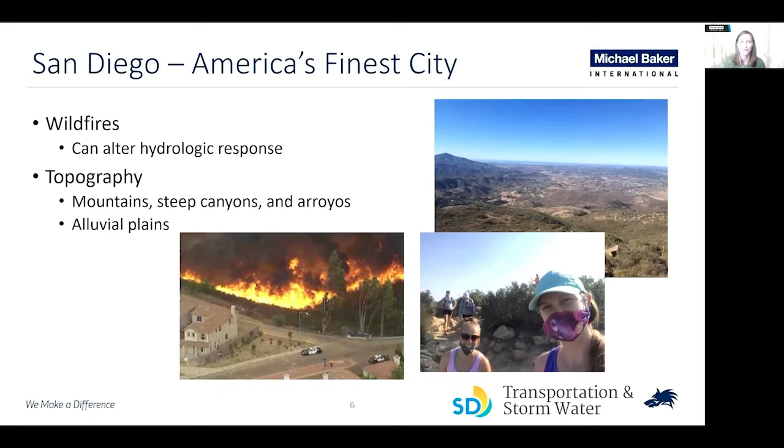However, it does mean we have excellent hiking trails just a short drive from the city center, and fantastic views of the skyline from the top of your favorite mountain.

The city has 6 major watersheds, with headwaters all in the Volcan Mountains to the east, all draining to the Pacific Ocean. The local ecology, like most of Southern California, is desert scrub and chaparral, mostly drought-resistant vegetation. At over 26 miles of coastline, tidal marshes and canyons can be found, creating a transition from shallow marsh to imposing beach cliff. The city is also home to many listed endangered species of plants and animals, including many migratory birds on the Pacific Flyway, which is a real thing.

Protected areas are designated as Areas of Special Biological Significance, or ASBS, or Environmentally Sensitive Area, ESA, which is somewhat similar to a Coastal Barrier Resource System, or COBRA zone, that many of you might be familiar with. As a note, the city does not have any COBRA zones.

So when we're not complaining about the weather, we're building. Land uses within the city limits are largely built out, with the highest concentrations of development downstream in the watershed, set against their coastline. Some of this area is also reserved for our military, which is a large proportion of the local economy. Tourism is the next largest industry due to our expanse of beaches, parks, and the wonderful climate. San Diego County had over 32 million visitors in 2012 that collectively spent over $8 billion.

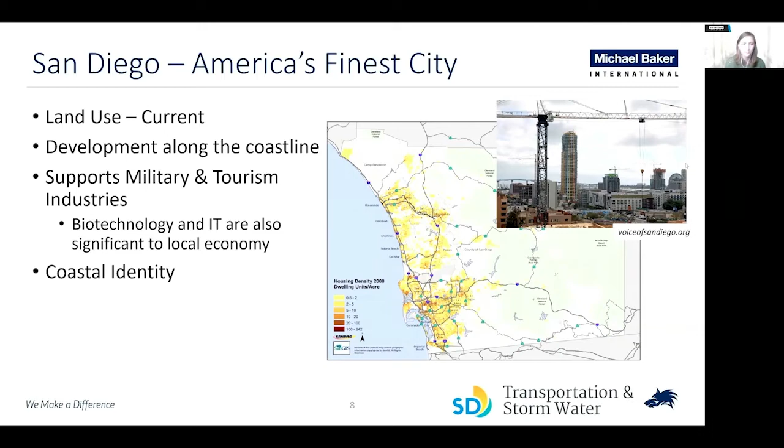And we're not just building, we're growing. At about 1.5 million people currently, that number is forecasted to increase to 1.9 million by 2050. This population increase is also expected to need more jobs and more housing, which those needs are expected to increase 25% and 19% respectively between 2020 and 2050.

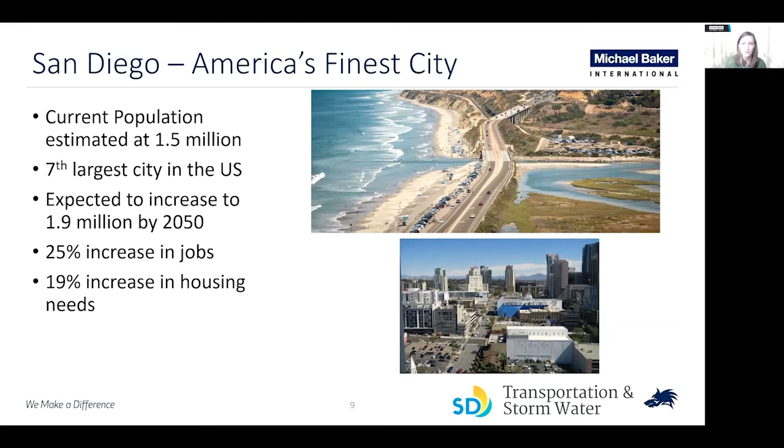Which brings us to the floodplain. The city has over 35 square miles of special flood hazard area, including both coastal and riverine flooding sources. Mapped areas within the city include Zone A, AE, AO, coastal VE, and X.

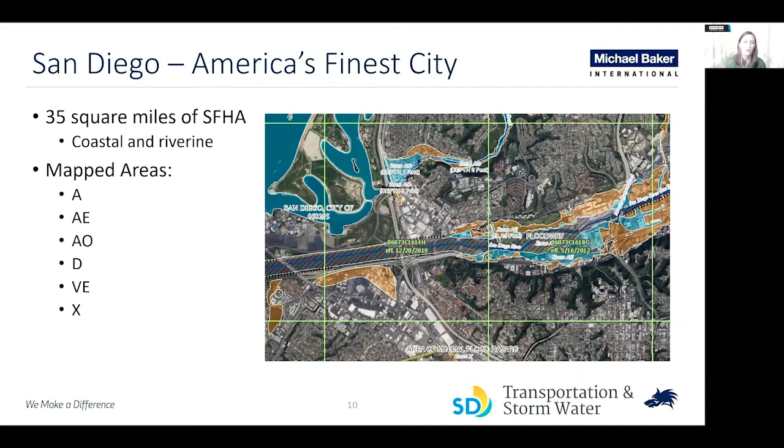The city maintains a municipal separate storm sewer system, or an MS4 permit. The whole drainage system contains approximately 50 miles of streams and channels, 20 miles of brow ditches and box culverts, 770 miles of storm drains, and 47,000 structures, including 5,000 outlets.

Additional flood control is afforded by 11 dams, 4 of which are in the city limits. We also have 7 levee systems, 4 of which are owned and maintained by the city.

At the coast, we're lucky that much of the shoreline is protected from tidal floods by lagoons, bays, and estuaries. However, this is in stark contrast to large cliffs or bluffs that, while they do provide elevation above storm surges, need to be carefully monitored for the public.

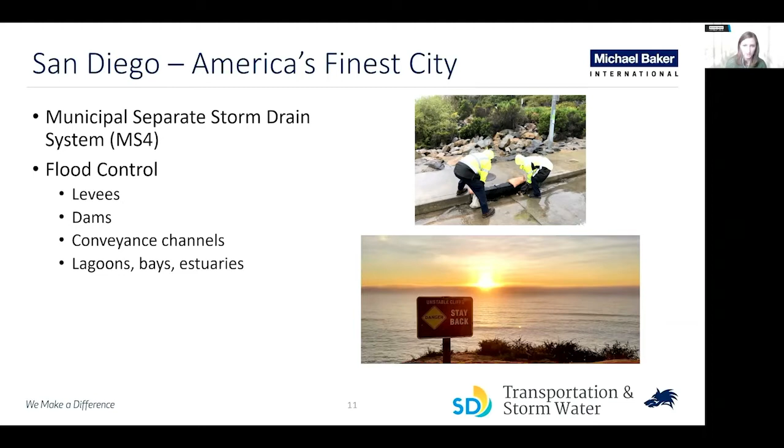So, who oversees all of this? As it pertains to managing the floodplain, the Transportation and Stormwater Department is responsible for managing all of the regulatory special flood hazard area, conveyance channels, and the MS4 storm sewer system for the city.

So the mission of the Stormwater Department is to both protect water quality and provide safety from flooding. The 6 core principles are to provide flood-safe communities, look at stormwater as a resource, provide community benefits, protect the environment, utilize public partnerships, and ultimately provide clean, safe water.

So T&SW is responsible for a number of assets to fulfill their mission. Hard assets include the conveyances, pump stations, and diversions, structural BMPs, and flood control structures such as levees and dams.

To manage flood risk, T&SW conducts regular channel and pump station inspections and routine maintenance, operates tide gates during floods, completes storm drain repairs and replacement, manages stormwater basins, and is also a steward of the local habitat and migration areas.

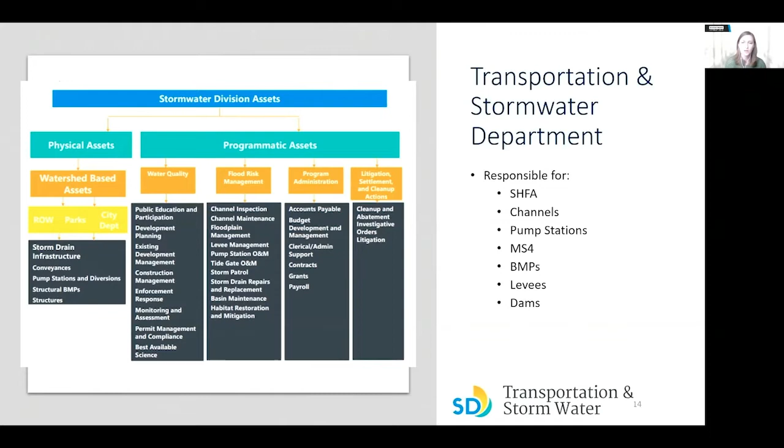T&SW is also responsible for administrating the NFIP, which includes issuing floodplain development permits, completing inspections to assure compliance with the local ordinance, maintaining records of floodplain development, assisting with the preparation and revision of maps, and helping residents obtain information on flood hazards, map data, flood insurance, and proper construction measures.

So for the risk mitigation minded in the audience, there are many challenges for the city. While the rainy season is short and confined, these intense storms, plus topography, plus large amounts of built upon area, lead to a flashy hydrologic response, which can be exacerbated by wildfires.

Increase in population and housing demand also means less space for flood mitigation area.

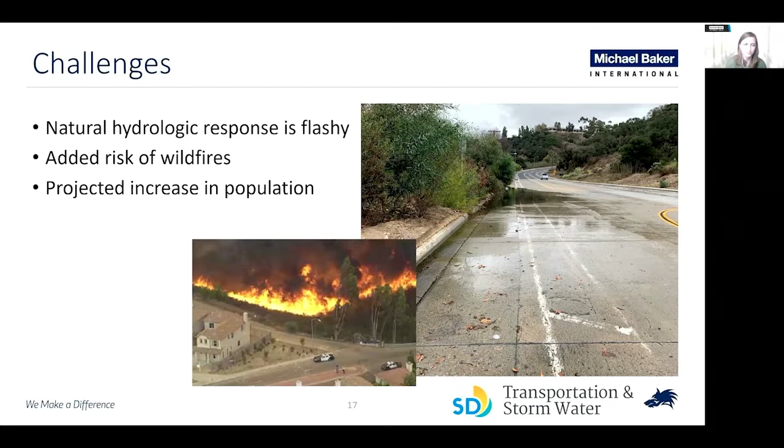Building green infrastructure is also challenging, as the vegetation, which is crucial to the proper function of any green BMP, needs a consistent supply of water. Our climate doesn't really support that, and most, if not all, stormwater BMPs require some form of irrigation.

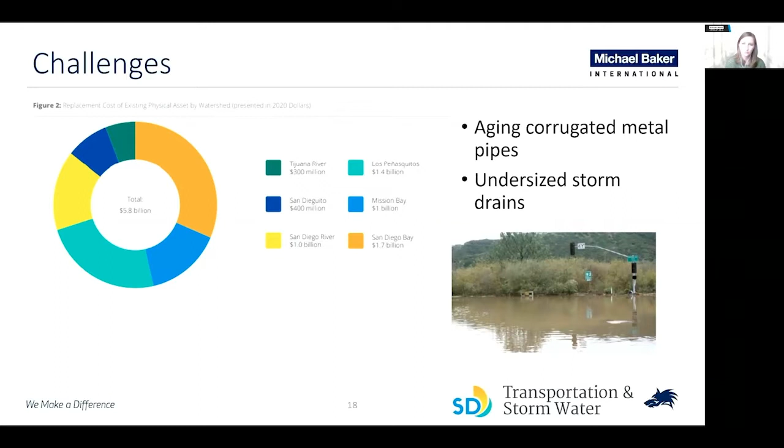We also have a lot of natural areas that need protection. Arroyos are steep-sided gullies formed by fast-flowing water in arid and semi-arid climates of the southwestern United States. They are susceptible to hydromodification, which is the alteration of the natural flow of water through a landscape due to urbanization as a result of their steep slopes and narrow flow areas.

Impacts of hydromodification are a general decline in the health of the watershed, seen as unstable stream banks, sediment erosion and deposition, and sometimes dangerous flow conditions.

San Diego County is also at the top of the list nationally for our numbers of endangered plant and animal species. The variations in rainfall, temperature, elevation, and topography leads to an incredibly diverse plant habitat with over 1,500 species native to San Diego County. Many of these species are endemic, meaning they cannot be found in any other part of the world. The city therefore has a responsibility to protect this biodiversity for future generations.

Historically, floodplain management has followed the traditional model of responding to claims and losses when they happen. As a participating member of the NFIP, approximately 3,020 flood insurance policies are active, providing coverage of up to $869 million. As of 2019, we estimated 652 losses and a total of $10 million paid.

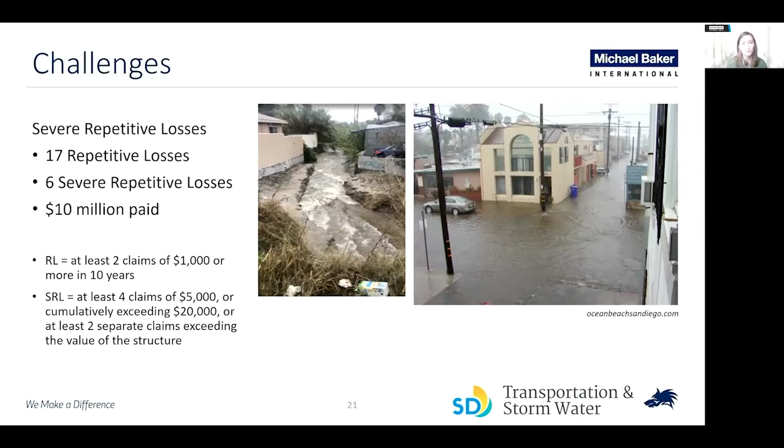As of 2006, there were 17 RL properties and 6 SRL properties in the city. Only 7 of these properties were insured. The capital improvements required to fix these areas are complex and extensive, reflecting the challenges I've previously mentioned. There are also many areas of the city that flood frequently but are not mapped in the SFHA and thus are not insured. I'll provide an example of one such area later in this presentation.

The last community assistance visit occurred in 2018, and the city is working with those findings to strengthen the overall program. The CAV is a visit to a community by a FEMA staff member, or the staff of a state agency on behalf of FEMA, that serves the dual purpose of providing technical assistance to the community and assuring that the community is adequately enforcing its floodplain management regulations.

Generally, a CAV consists of a tour of the floodplain, an inspection of community permit files, and meetings with local appointed and elected officials. If any administrative problems or potential violations are identified during a CAV, the community will be notified and given the opportunity to correct those administrative procedures and remedy the violations to the maximum extent possible within the established deadlines.

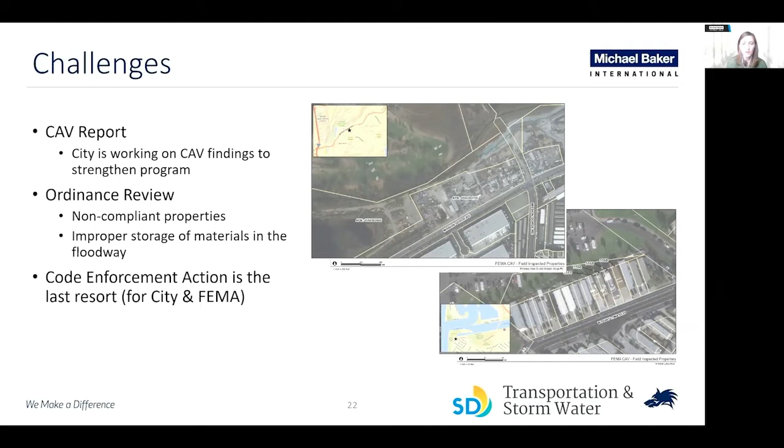This report for the city included a code compliance review and identified several non-compliant properties in the floodplain. Fixing these issues requires a long lead time and the dedication of resources to do everything we can to avoid enforcement action, but it is a last resort for both the city and FEMA.

With this growing list of issues, it's very challenging to keep up with maintenance. The O&M group worked very hard to keep the MS4 clean and clear, but it's often hard to get ahead of Mother Nature. A lot of burden thus falls on the O&M group to keep up with their growing list of tasks before they turn into full-blown projects.

To complicate things further, they have to be vigilantly aware of nesting birds, removing vegetative habitat, and also balancing wildfire risks. Many routine maintenance actions therefore require an environmental permit, which can delay action.

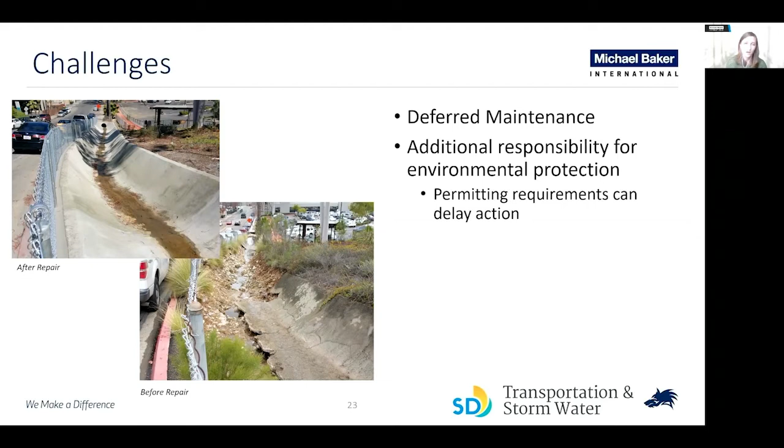So how do we take all of these challenges and turn toward a more proactive way of managing the floodplain? Well, the city has acted on some ideas. First of all, some good things came out of the CAV. We were able to work directly with FEMA and have a line-by-line code review, and found that our 2-foot freeboard requirement gave a lot of extra coverage.

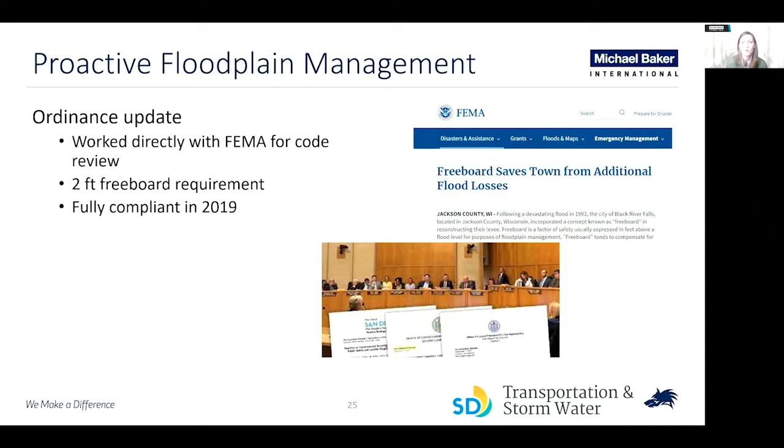Freeboard is the factor of safety, expressed as the feet above base flood level, that new or substantially improved buildings need to be elevated to. The 2-foot requirement is 1 foot higher than the NFIP minimum requirement. As a result of that coordination with FEMA, the Coastal Commission, and council members, we were able to achieve a fully compliant code in 2019.

As I mentioned previously, the city has many areas that frequently flood, but the affected properties are not insured by the NFIP. One such area is described as Auburn Creek, which is a tributary to the Chollas Creek watershed that flows through most of the urbanized area of San Diego. The flooding affects residential structures, roads, and public parks.

Also, according to CDC reporting, this area was designated as socially vulnerable, with many families low income, either having English as their second language or at a secondary education level.

Auburn Creek also shows signs of severe erosion caused by high velocity flows and restricted creek capacity along much of the stream corridor. As a result of the high velocity flow and active erosion, there is little vegetation along the stream banks. There are no stormwater quality treatment facilities in place, and illegal dumping occurs along this stretch, resulting in large amounts of trash and debris that exacerbate the conveyance problems.

The city receives regular damage claims in this area, as none of the properties have flood insurance coverage, and most likely wouldn't be able to afford it anyways. So the city really wanted to help residents in this area, and developed a revitalization plan to upsize the drainage infrastructure and turn the floodplain area into a park that would also provide stormwater quality treatment.

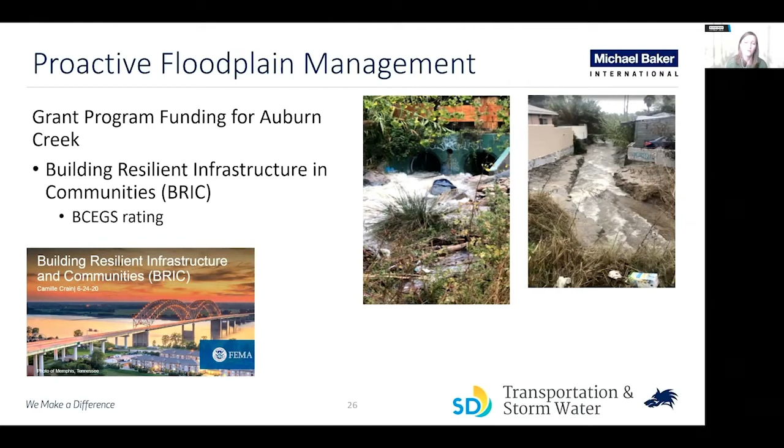So after the BRIC determination, we requested a debriefing with Cal OES, which is the Office of Emergency Services and the administrator for the BRIC program in California, to go over our application. Eventually, we decided that advance assistance was a possible path towards developing the project further. Advance assistance is part of HMGP, which means that funding has to be tied to a disaster. Fortunately or unfortunately, San Diego County is eligible for funding related to a wildfire disaster that occurred last October. So we decided to proceed with pulling together an application for advance assistance for Auburn Creek.

Pursuing this program also has the added benefit of allowing us to take a step back to identify and engage stakeholders and provide public outreach to find a solution that the community is on board with. Environmental stewardship is a shared responsibility, and the city is always looking for opportunities to involve the public. Ultimately, the goal is a win-win for the city to reduce the number of flooding claims in this area and to keep the public safe.

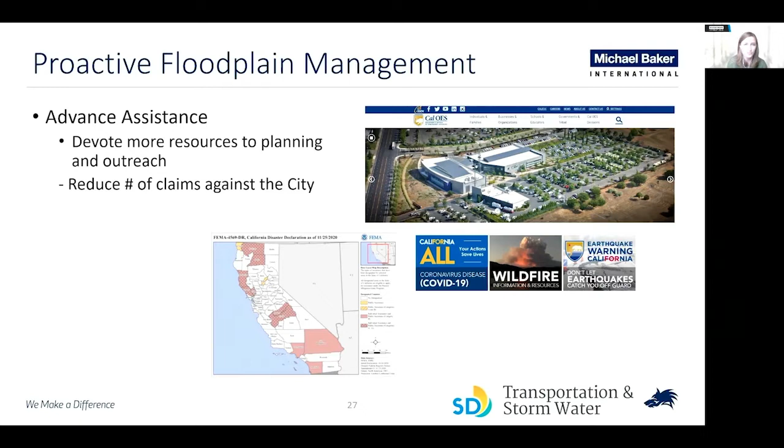So I mentioned our coordination with Cal OES, but it doesn't stop there. We're also supporting FEMA with their efforts to restudy the San Diego River. We've been involved to help provide as-built, technical studies, O&M records, dam operation records, and served as a central point of communication with the neighboring cities. FEMA doesn't operate in a black box, and we found it very helpful to be involved in the modeling process to get an idea of what the map updates are going to look like and how to prepare to support the public.

We continue to collaborate with the Coastal Commission, whose involvement was critical with our floodplain code update. And then we're also right on the border, so we need to keep in touch with the IBWC. We share the Tijuana River with Mexico, so this is an ongoing effort between the city and our neighbors to the south.

Another really cool initiative was the MWMP. As most of us know, a storm drain system requires periodic maintenance to remove accumulated sediment, vegetation, and trash that impedes water flow and increases flood risks. The city developed a new Municipal Waterways Maintenance Plan, or MWMP, that guides maintenance of the storm drain system to more efficiently provide public safety through a proactive and responsive maintenance schedule that minimizes and mitigates effects on the environment and streamlines subsequent authorizations.

This plan was developed through site visits and as-built easement research in high flood risk channels. These easements were digitized into a GIS database for integration with other departments, such as environmental and planning and public works. The GIS tool for channel maintenance tracks, records, and notifies management of maintenance tasks to be completed.

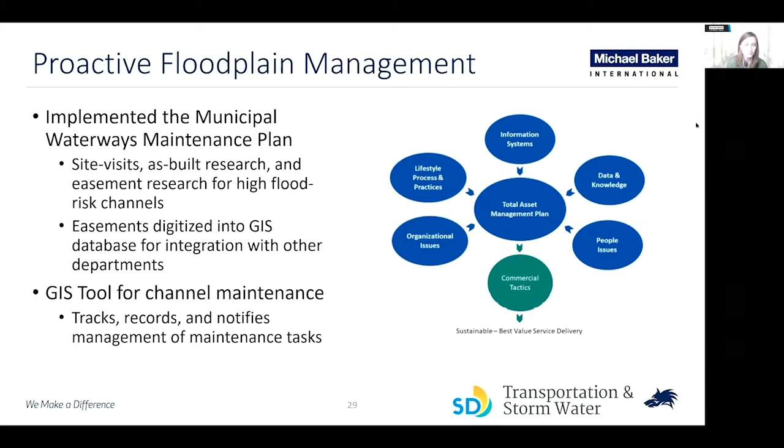So the goals of the MWMP are to provide flood risk reduction, infrastructure sustainability, and resource protection and restoration. The programmatic citywide approach is preferred by regulatory agencies, which can streamline permit processing, provide consistent permit conditions, and make the process more transparent and predictable.

Much of the effort towards developing and implementing the MWMP also addresses water quality. Pollution prevention activities such as street sweeping, drain cleaning, and maintaining retention basins contribute to the water quality goal of reducing sediment sources to the waterways. Some of the tracking measures can also be repurposed for water quality and habitat monitoring.

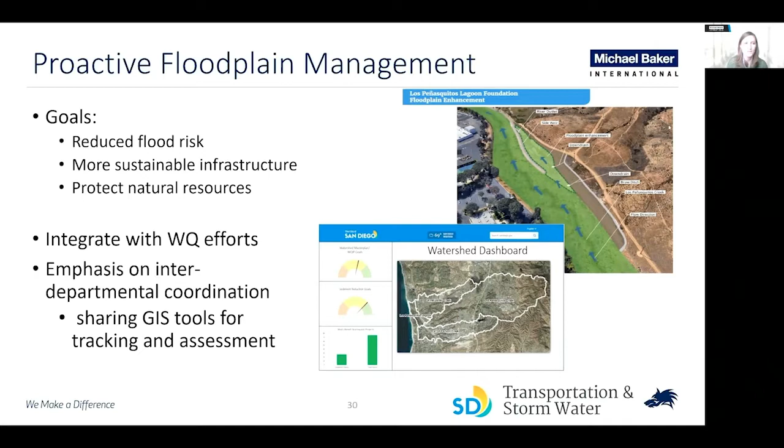So with all that, what does the future of the floodplain management program look like?

First stop, everyone wants to be in the CRS. The Community Rating System is a voluntary incentive program that recognizes and encourages floodplain management practices that go beyond the minimum requirements of the NFIP.

The CRS provides a percentage discount on insurance rates depending on the level of rating achieved. The lowest class receives a 5% discount, but the highest achievable is 45%. This is an attractive option to provide relief to those disadvantaged communities in the mapped floodplain. It is also a direct benefit to them as dollars in their pockets.

In addition to discounts, the CRS will also provide technical assistance in designing and implementing flood fighting measures, available at no cost to the city.

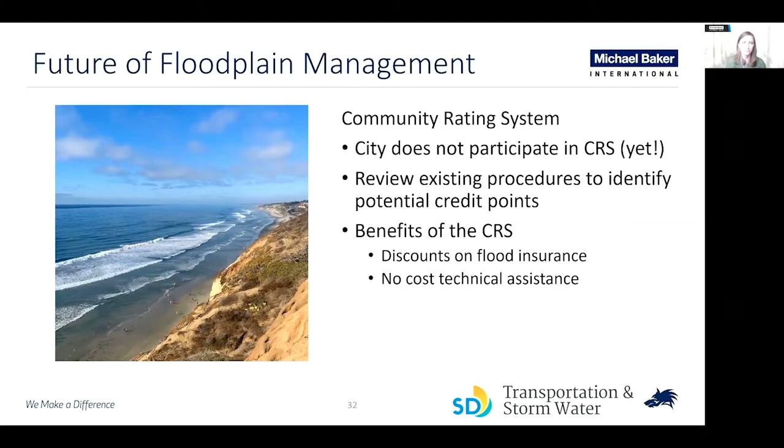We are also looking at becoming a Cooperating Technical Partner, or CTP. The CTP program's mission is to leverage partnerships to support the Risk MAP program, kind of share the load, and allow communities to take ownership of their own flood map products.

FEMA supports the CTP program to leverage community level experience, obtain data, and provide funding. By becoming a CTP, the partner formalizes its contributions and commitment to the program, ensuring better overall flood risk identification and community protection through the development of reliable and up-to-date flood maps and community outreach.

The city is looking to leverage that partnership, with the first step being to obtain funding to complete CLOMR-LOMR reviews. A lot of the maps are outdated and rely on the CLOMR-LOMR process for any updates. The overall goal is to complete our own data collection and eventually flood hazard mapping.

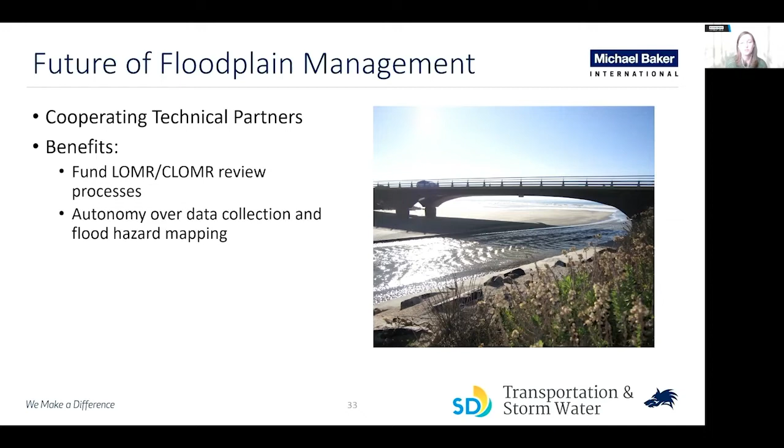So finally, we're looking into additional sources of funding. There are more areas like Auburn Creek that need support. Each time we go through an application, the process gets more streamlined.

So overall, the city's approach — besides just getting started — some tactics are to first take credit for what you're already doing. This is the low-hanging fruit that requires minimal effort to start realizing some benefits.

Secondly, look for opportunities to cross-collaborate. Floodplain management is multidisciplinary and shares similar goals with other departments and regulatory bodies.

And finally, take advantage of those FEMA programs. Don't be afraid to reach out to your state coordinators, as they're there to help. Even if one opportunity is unsuccessful, they're much better at navigating the ins and outs of each program and can point you to a better fit if you're willing to follow it through.

So with that, thank you for listening to my presentation. I'd be happy to take some questions, and I hope you all have a good time at the rest of the conference.

All right, great job, Stephanie. And thank you so much for being here with us today.

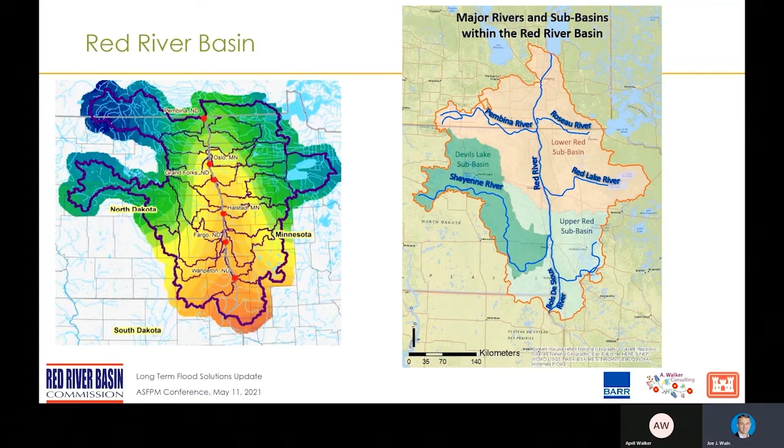The long-term flood solutions update was organized by the Red River Basin Commission, which provided oversight and facilitation. Barr Engineering and A. Walker Consulting did much of the technical work for the update, but we also had significant support from the U.S. Army Corps of Engineers. Local stakeholders have also contributed to the review and content, namely the Minnesota Department of Natural Resources, North Dakota State Water Commission, municipal leaders, water boards, as well as some other consultants who have been studying retention options in the basin.

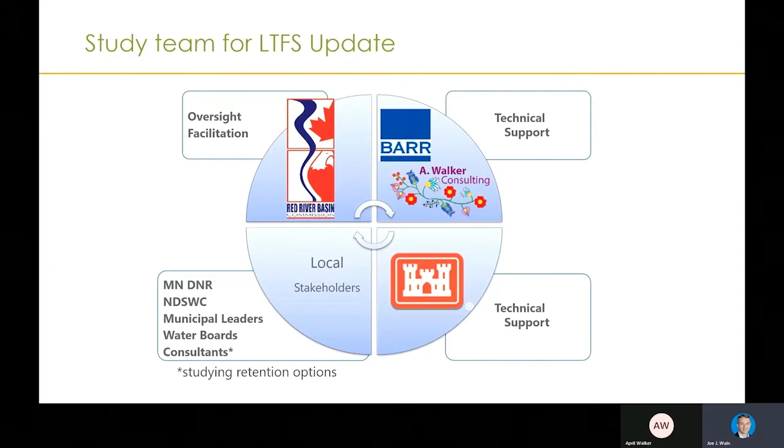The long-term flood solutions study was first published in 2011, and it established goals for the basin for managing water and reducing flood risk. In 2014, a progress report was published, and now that we're 10 years out, we are in the process of creating an update and additions to this report to advance it with better information and provide a status on how we are doing towards meeting the goals established in 2011.

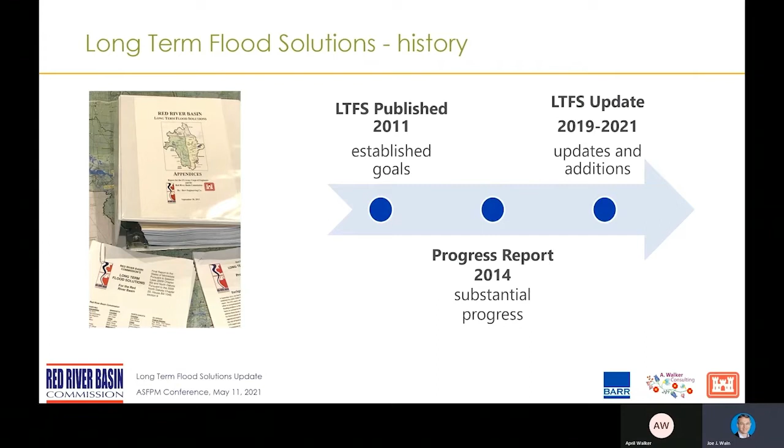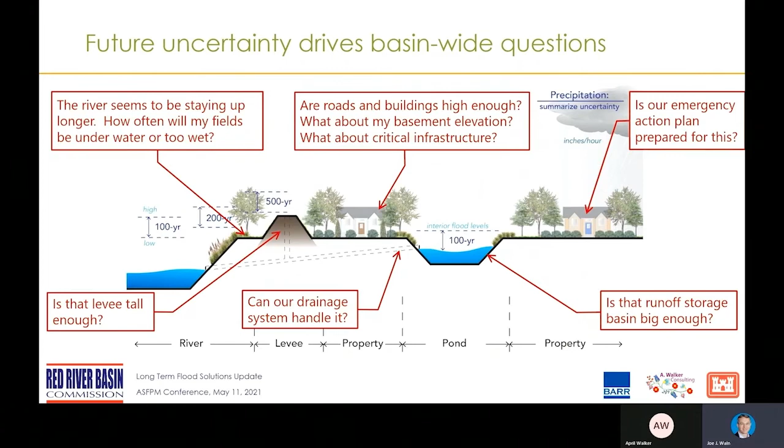From those aspirational goals, the different communities in the basin have been looking at their flood risk, and there are lots of questions that people are asking. There's uncertainty about what climate will do to the region, and whether infrastructure is built high enough or large enough to withstand intense rainstorms, bigger floods. And these questions are one of the big reasons that we engaged in this update.

The update to the LTFS involves several tasks. We are focusing today on task 4, which was the review of policy and regulation within the basin as well as outside the basin to develop recommendations on how floodplain ordinances and policy could be improved within the basin.

In the United States, we have the NFIP, National Flood Insurance Program, that's administered by FEMA. The Red River Basin Commission straddles the boundary between Region 5 and Region 8. The focus of the update was on the counties and cities, primarily within North Dakota and Minnesota, although we did look at townships and tribes.

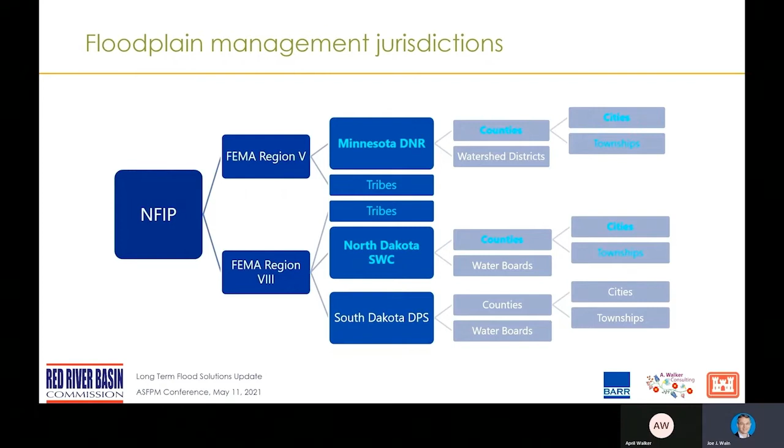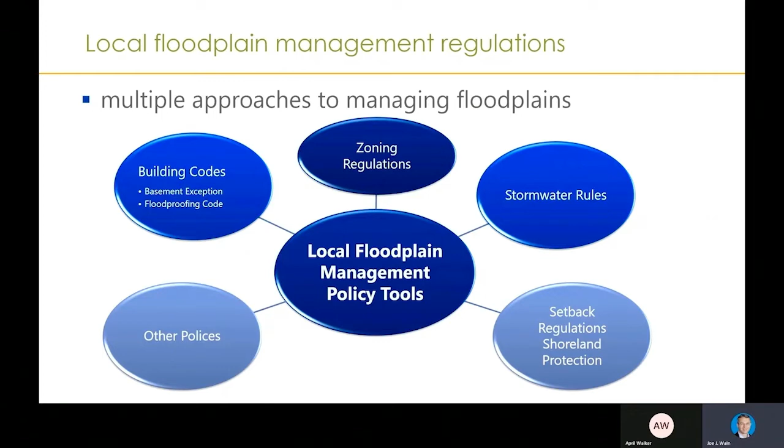When we get down to that local level, the counties and cities, we find that there are multiple approaches to floodplain management. There's different policy tools that communities adopt. Generally, states provide some sort of model ordinance, but after that, cities may adopt that model ordinance into their zoning regulations, but there might be other rules related to floodplain management in their stormwater rules or their building code, or other policy documents. Sometimes the regulations reference these documents because it's easier to update those documents than it is to update zoning regulations, for example.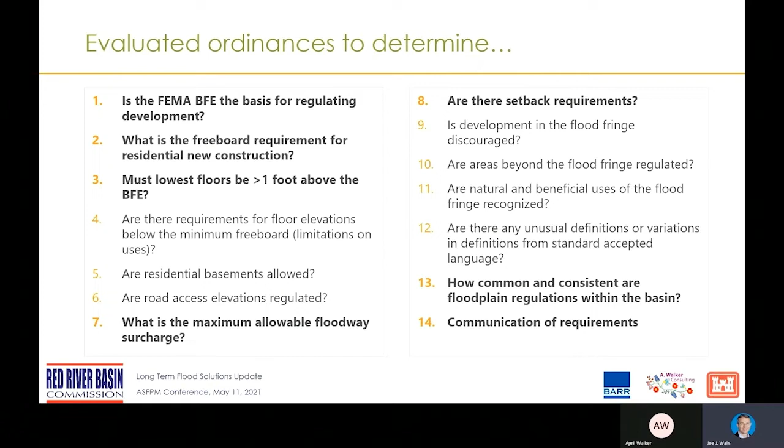So as we looked at the regulations in the Red River Basin, we asked questions or investigated these 14 different criteria. In our presentation today, we're going to focus on the bolded items, or highlight the results from the bolded items on this slide here.

But before we dive into those, I want to talk a little bit more in detail about the basin itself and where we focused the updates. The Red River flows south to north from the northeast corner of South Dakota, and we focused primarily on the counties on either side of the Red River. That's where the majority of the population is and where most of the flood issues are. Those 12 counties have a population a little over 400,000 people.

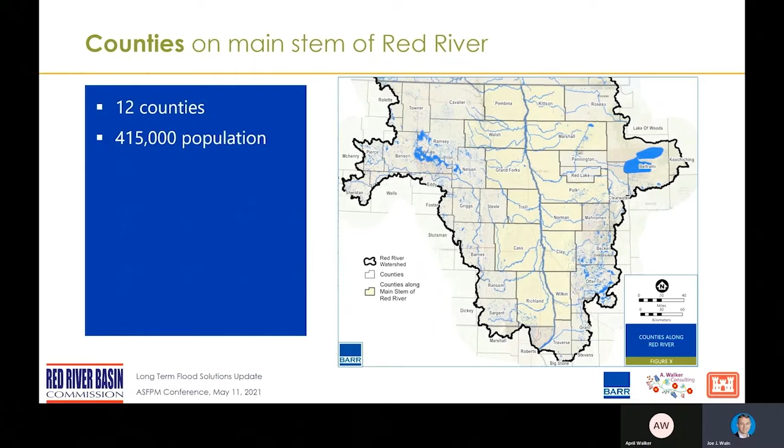Within those 12 counties, there are 143 cities. Roughly 3/4 of that population are in urban towns or cities.

The map on the right shows different color coding for the cities and counties. The more green, the more recent their flood insurance documents are. Red and yellow mean those documents are older. The good news is that much of the basin, at least along the Red River, has fairly recent FIS documents.

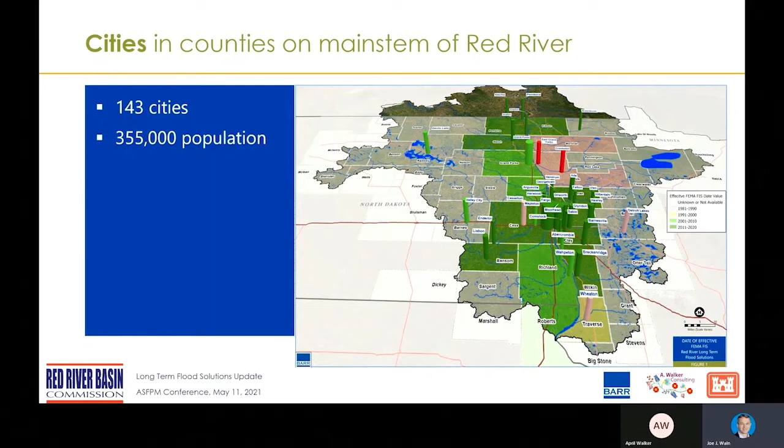Of the 14 categories we looked at, the first three relate to how people are regulating development within the floodplain. We found that the vast majority of communities are using FEMA's base flood elevation to regulate development, which is a good thing.

We found that the freeboard requirement for residential new construction varies from community to community, but there is general consistency—it's usually the base flood elevation plus some amount of freeboard. Most first floors or lowest floors are required to be at least 1 foot above that base flood elevation.

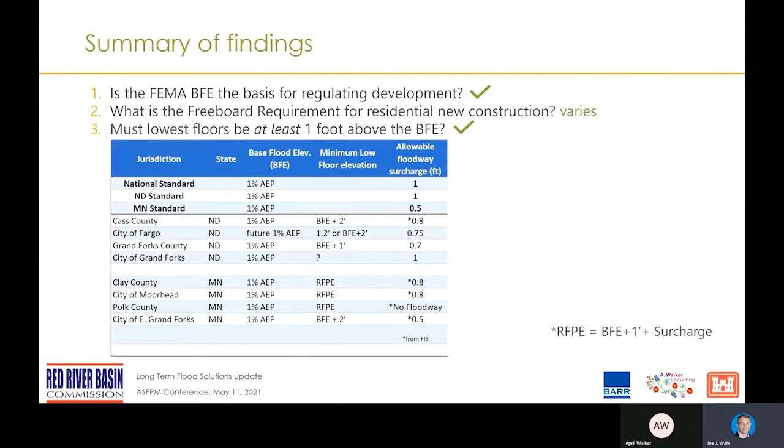One interesting anomaly we found within the Red River Basin is that the Red River is a boundary water between Minnesota and North Dakota. In the model ordinance for Minnesota, when defining a floodplain, you're generally allowed up to 1/2 foot of surcharge, while in North Dakota you're allowed 1 foot. So the communities along the Red River, when updating their flood insurance studies, often had to negotiate what would be included in that document.

At one point on the river, they used a negotiated 9 inches, applied equally to both sides. At other points along the river, it was 6 inches in North Dakota and 3 inches in Minnesota.

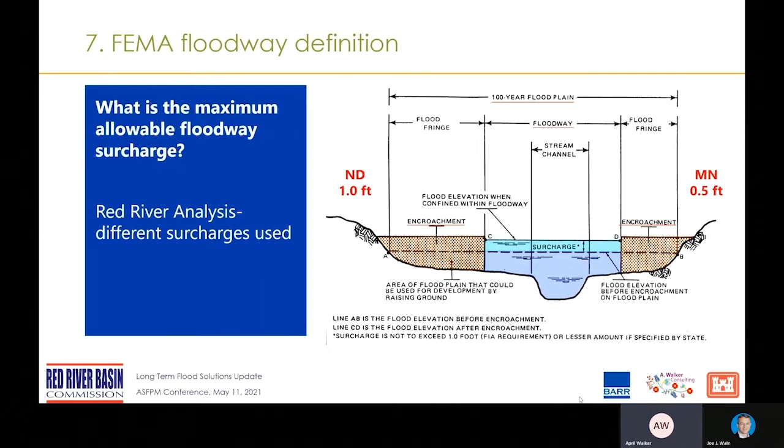Minnesota includes, as Joe was just talking about, in that RFPE, the base flood elevation plus 1 foot plus any surcharge. Knowing what the surcharge was when your floodway was defined becomes very important in appropriately managing your floodplain. The next item we looked at was watercourse setbacks.

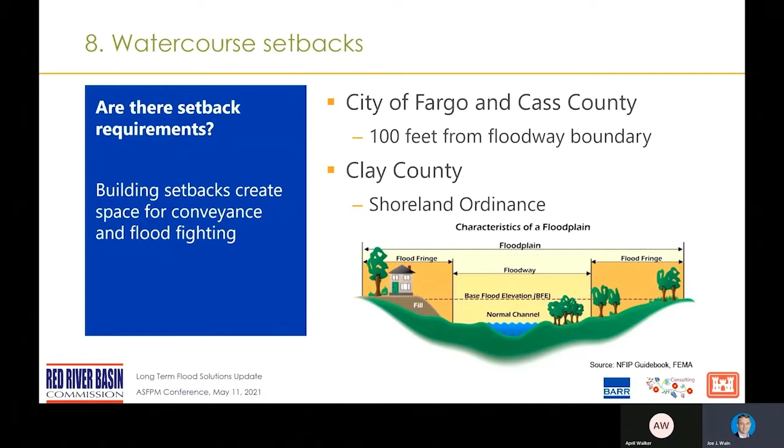Namely, are there setback requirements in most communities? We found there were some. The city of Fargo and Cass County both have a 100-foot setback from the floodway boundary. On the other side of the state line, Clay County, Minnesota, has a shoreland ordinance requiring some setback from waterways. In general, setbacks are not a very common regulatory tool, and we think there's room to expand this practice to keep people further away from flooding sources.

The next item, number 13, looked at how consistent and common the regulations are throughout the basin. FEMA base flood elevations are common and highly consistent. The floodway surcharge definition is common, but the surcharge itself is not consistent, at least not across state lines. The regulatory flood protection elevation is commonly used but differs by state. Model ordinance adoption—most communities have adopted it, but sometimes those ordinances are outdated. The 1 foot or more of freeboard for low floors tends to differ by state.

Where things are less common: it's less common for communities to regulate to events greater than the 1% chance annual exceedance probability. As we talked about at the beginning, one of the aspirational goals for the basin was for developed areas to regulate to a higher, less frequent event. Local ordinances being similar and current is also not very common, and oftentimes are outdated. And we just talked about setback requirements not being very common.

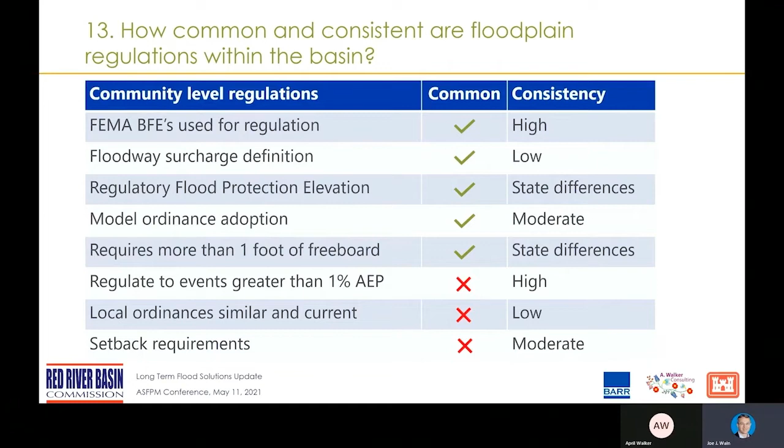On this slide, we highlight some of those state differences in more detail. We talked about the floodway surcharge being generally 1 foot in North Dakota and 1/2 foot in Minnesota, but on the Red River, community by community or adjacent communities have negotiated different numbers, so it's not a set number, which could cause some confusion. The regulatory flood protection elevation definition also varies across state lines.

Another difference is with model ordinances. North Dakota has a single model ordinance. Minnesota has 3 different model ordinances—one that has different flood overlay districts common in floodplain ordinances, but there are separate model ordinances; for example, a separate one is for communities that don't have a lot of development in the floodplain, though maybe in the future they could.

If communities adopt a stricter ordinance that doesn't allow any development in the floodplain, they can avoid a lot of the problems that communities that are already built out continue to face.

Setbacks, we talked about those differences in item number 8. There are some in North Dakota, and we have the shoreland ordinance in Minnesota. For fill limitations, North Dakota does not have a limitation, while Minnesota limits fill in the floodplain to 1,000 cubic yards. One thing we liked about Minnesota's ordinances is that they include natural beneficial use protection.

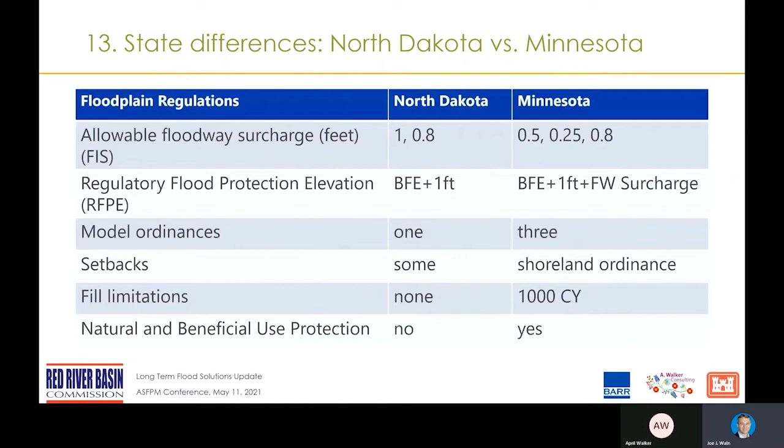As Joe indicated earlier, when you're looking at a community's floodplain management rules, you might be pulling information from the zoning code, the stormwater management code, water setback rules, or the building codes. We found that many jurisdictions, particularly those with higher development rates, have created guidance documents to help pull all of those sources of information together and make it easier for the end user to understand.

What you see here is an example of one of those guidance documents, from the Minnesota DNR, that helps you visualize and understand what their rules really mean. It clearly shows that the lowest floor is required to be elevated on fill, and that fill has to be at or above the BFE for 15 feet away from the structure. It shows the regulatory flood protection elevation, and a lot of detail you can convey in an image like this. This practice was not consistent throughout the basin, but was available in areas where development is occurring, and something we think should continue.

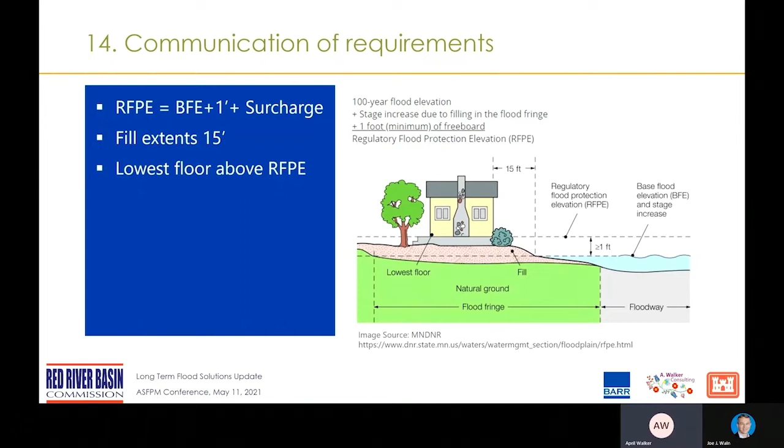One of the things we wanted to check was what other communities are doing in relation to higher standards. We found that many do regulate to higher standards. We've listed 4 examples here, but there are many others.

Harris County, Texas regulates to the 0.2% chance AEP, or 500-year event. This was a response to the massive damages experienced during Hurricane Harvey. Cedar Falls, Iowa regulates to the 0.2% chance AEP plus 1 foot. They don't allow new lots in that 0.2% chance floodplain, and they also limit the amount of fill that can be put on a property to achieve a LOMR.

One example outside of the United States is Saskatchewan, Canada. They also regulate to the 0.2% chance event plus half a meter. The other part of their regulation we wanted to highlight is that they use a different way of defining their floodway, using a depth and velocity metric to define what areas are off limits for building and are reserved for the flood.

The last example we want to share is Charlotte, North Carolina, Charlotte-Mecklenburg County. They have, for some years now, been using local floodplain maps. So if you take all of the acronyms from FEMA and apply them locally - a local BFE, a local floodway, a local floodplain - they're able to map future floodplain extents that take into account future development, even future hydrologic changes.

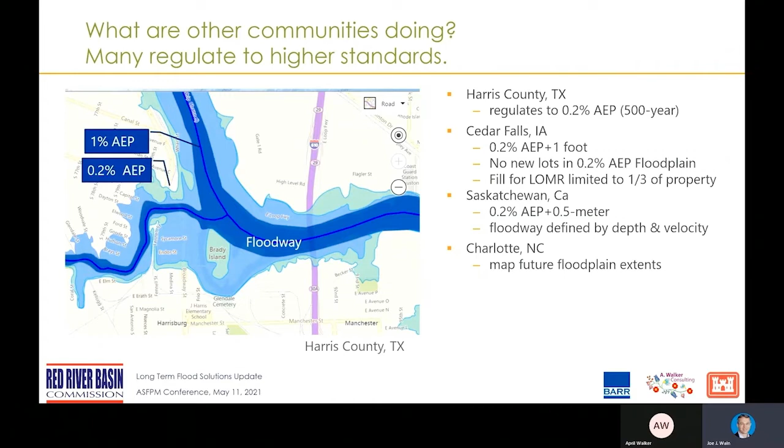Moving now to the recommendations we're making moving forward. Joe told you a little bit about the model ordinance in Minnesota that says, why don't you just prohibit development in the floodplain? We think that's a great option in communities where you don't have a lot of development pressure and have available developable high ground - this is a method you could use to really simplify the administration of your floodplain. It also does a great job of providing protection to natural and beneficial uses. We would like to see more use of model ordinances that allow for that option.

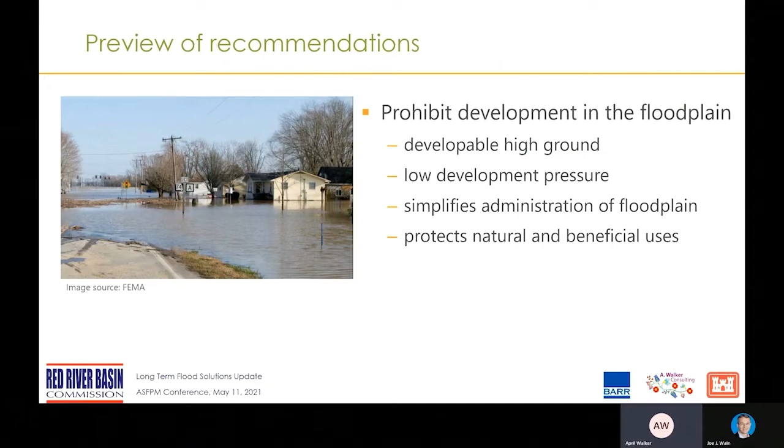Increasing your freeboard requirements is something we're recommending. What you see here is just a snippet of a floodplain map taken from FEMA's Map Service Center. It shows that this particular area, in Fargo, North Dakota - the West Acres shopping mall area, if you're familiar - is in a part of town considered protected by a levee. Because it's protected by a levee, you normally would not, under the floodplain management rules, have to provide any additional elevation in this area. It's mapped outside of the floodplain.

You can see by looking at the inset picture that in July of 2019, we had a rainfall here that was intense enough that the storm sewer system couldn't handle the rate of water coming toward it. We experienced a lot of street flooding, and a lot of the low areas filled up with water.

We call this pluvial flooding, when our storm sewer system is overwhelmed. If you're in a part of your community where meeting the minimum elevation requirements takes less than 3 feet of fill, this is a good option to increase that freeboard requirement so that even if your parking lot floods, like you see here, you can elevate buildings to be high enough to stay dry and not be at threat from pluvial flooding like this.

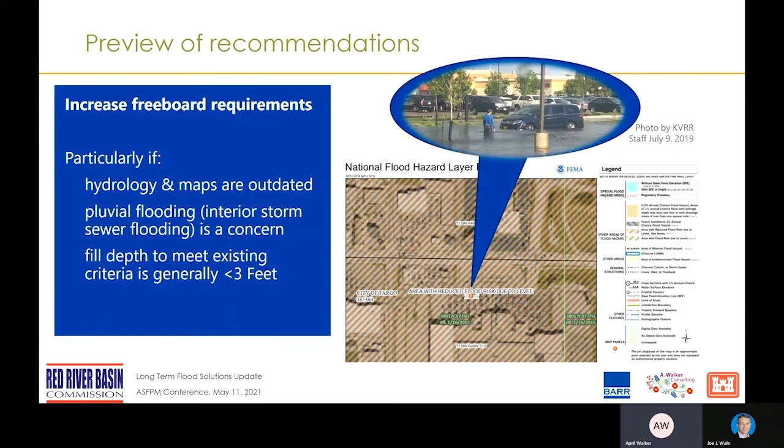This slide covers three different recommendations. First, require dry land access during a regional flood. Second, water course setbacks. And third, consider meander belt setbacks.

What you see is an example that addresses all three of these recommendations. This is a community in Cass County, North Dakota. It was an area removed from the floodway by LOMR back in the 1980s, and houses subsequently developed there. The area shown in red is the access road coming into that area, during a flood event when the road is actually flooded out.

At the bottom of the screen, you see that area after a series of back-to-back flooding events, where Cass County came in and actually removed all of those houses. This area did not have dry land access, and it was not set back from the floodway. The homes were actually built on mounds that were filled out of the floodway.

It's out into one of those meanders of the river, where the Red River is bending around the outside of the peninsula. So we can learn from this example where houses were built and subsequently removed, and strengthen our ordinances to prevent this type of development from occurring so we don't have to buy it out later.

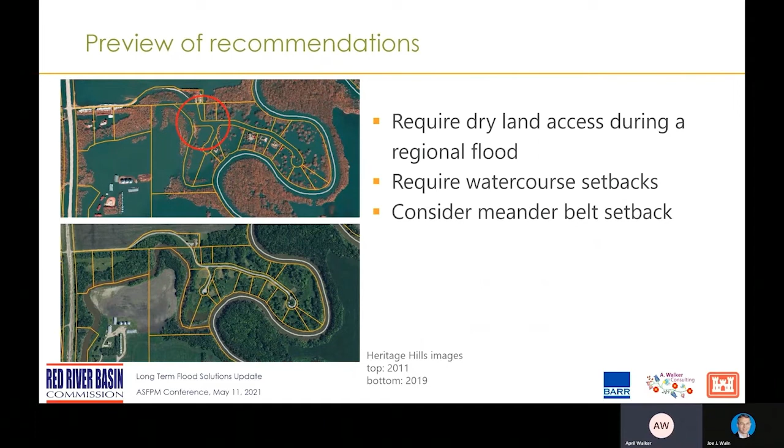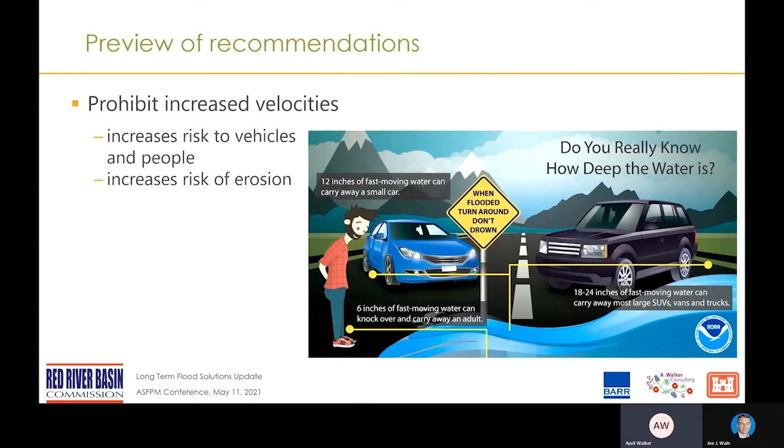This recommendation addresses something we're not great about in our ordinances: we're pretty good at thinking about elevation changes, but we don't have a lot dealing with velocities. Increased velocities increase erosion potential and add risk to people and vehicles. So we suggest that if you have the ability, take a look at prohibiting increased velocities and pay attention to the full flood regime characteristics when putting your ordinances together.

In addition to the added cost, you lose floodplain storage. So the recommendation here is that maybe in your community there should be a practical limit to the amount of fill allowed to make an area developable.

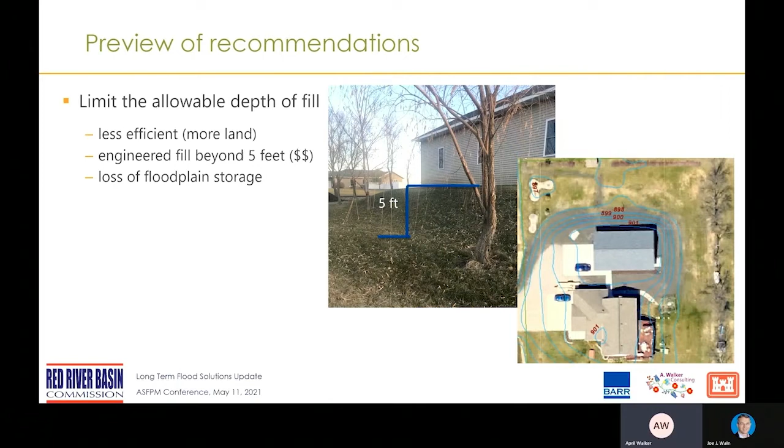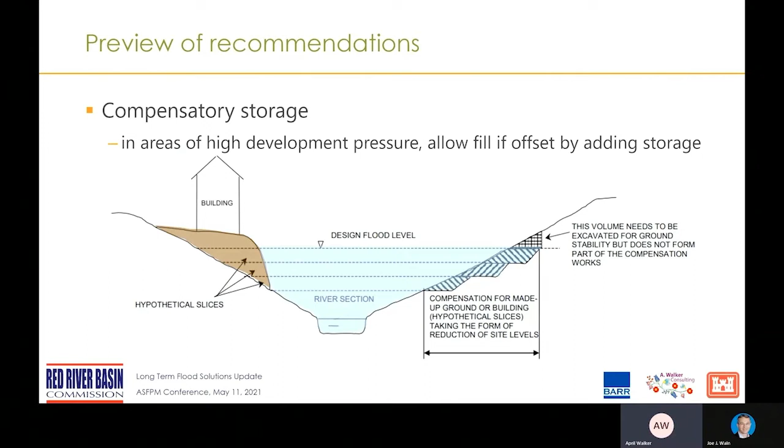Speaking of allowing fill, if you are going to allow it—particularly in a high development area or one with a lot of development pressure—one tool many communities are starting to use is requiring offset storage for any fill that impacts floodplain storage. We'll probably start to see a lot more of this as we move from steady state mapping to unsteady state mapping, and learn what it takes to manage an unsteady floodplain.

Another requirement: anytime a community rezones a piece of property, they have to notify people within a certain distance of that rezoning.

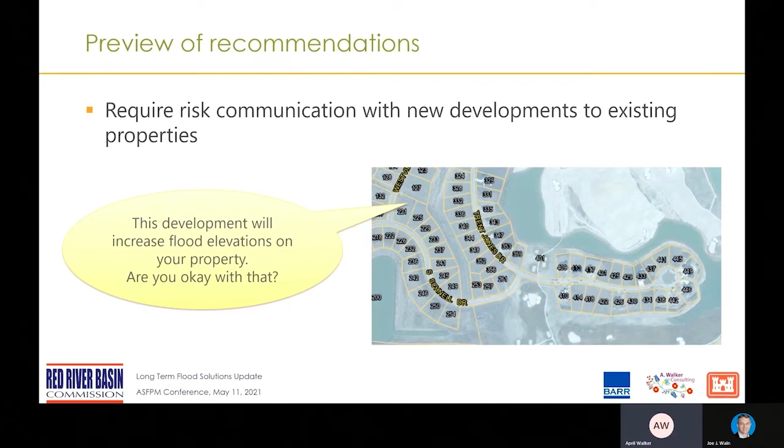We're suggesting here that if you are adding a development that has the capability of increasing water surface elevations for existing homes, perhaps it's just as appropriate to notify adjacent property owners of that possible change in water surface elevation, and allow them the opportunity to weigh in on whether that development is appropriate.

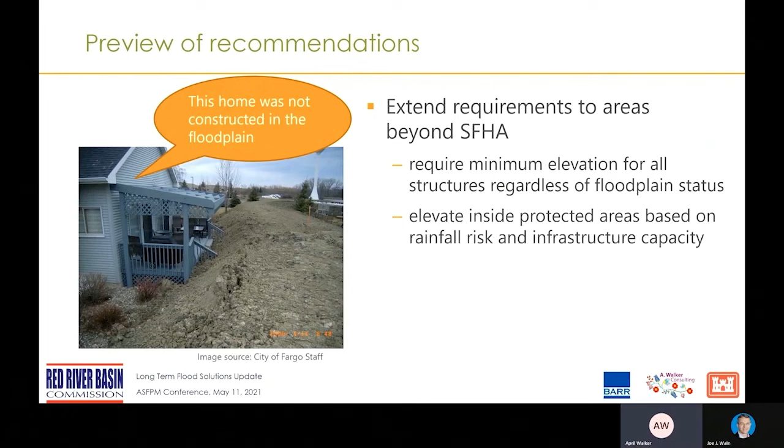We're recommending that communities that have floodplain management rules, particularly those located in multiple documents or different ordinances and different places, continue to use or develop easy to understand graphics that help illustrate the requirements of your community.

We think that the adoption of model ordinances is great. We suggest that if you do adopt a model ordinance, you look at it periodically and check to see if it needs to be updated.

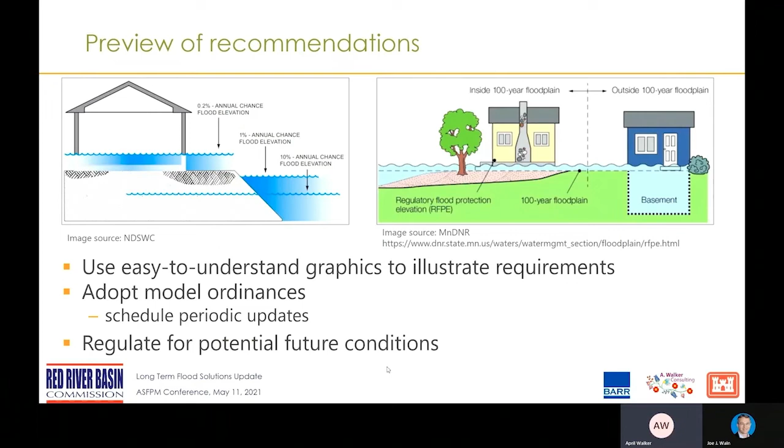Another thing we propose is that as you're developing an update to your ordinance, try to consider future conditions if at all possible. The reason this study began was in response to questions we were hearing from folks in our basin, and we don't think that's unique to our basin. We think people everywhere are asking these types of questions.

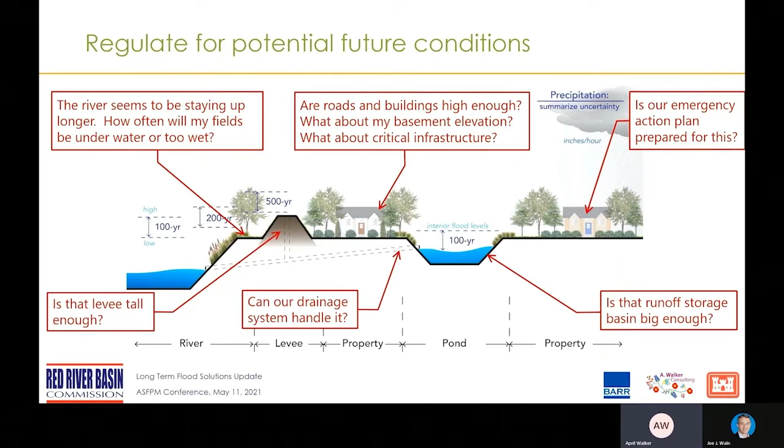Whatever you can do to consider future conditions in your current ordinancing is only going to make your community more resilient. With that, you can see here how to reach Joe or myself. If you have examples that we did not include that you think would be valuable, please feel free to reach out to us. We hope you're enjoying your conference, and we're glad that you chose to participate in our presentation today.

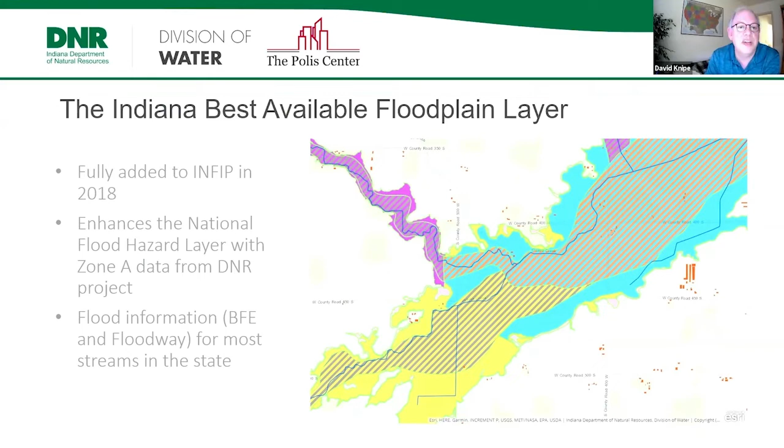It does have flood information, base flood elevations, and floodway for most of the streams in the state. We're well over 85 to 90% coverage, probably north of 90% now. Then there's the National Flood Hazard Layer. I'm assuming most of you are familiar with the NFHL, published by FEMA. It represents the actual FEMA flood insurance rate maps in a digital format with their viewers and all the information that goes with them, and that is used for insurance purposes. The Indiana Best Available Floodplain Layer is used more for permitting and construction, but the NFHL is for insurance.

In Indiana, we have 89 of 92 counties included. There are 3 that are not yet digital, down in the southwest corner of the state, due to some very complex levee situations with those counties that are precluding us from getting them published.

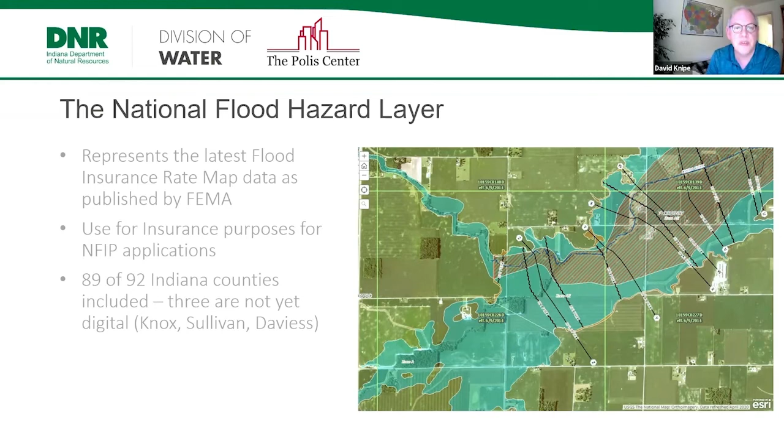So in what we call the Indiana Floodplain Information Layer, we have derived what are called flood elevation points. We did these back in 2008, 2009 when we introduced that. This was an idea so that we could do a determination of the base flood elevation for buildings, for development purposes, whatever you have.

So what we do is create a flood elevation point every 50 feet along the stream center line. With that stream center line and those points, the user can select any point on the map and get to the nearest flood elevation point. That point they choose does not have to be in the floodplain; it works outside the floodplain just as well as inside. It's been a major benefit that we're not constrained to the floodplain when we do these determinations.

But as we say, this project has—we've spent some time looking at that logic in our studies.

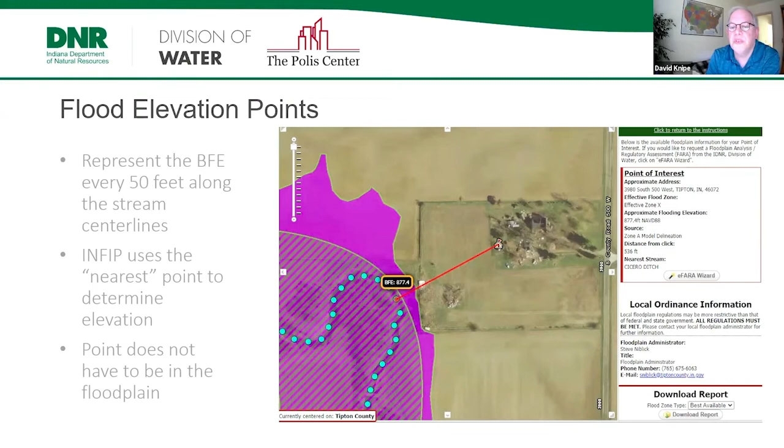For the study we've done, we chose one county to work with, Clark County. Clark County is in southern Indiana, directly across the river from Louisville, Kentucky. So the Ohio River is the boundary that you see on the southeast side of the county.

The goal of the study was to do a couple different things. One, we wanted to look at structural level floodplain analysis and take a good look at how we wanted to implement that in Indiana and push that idea forward. Since we have a lot of good data, it made sense to start looking at a statewide structure level analysis. We wanted to review the flood elevation point technology and include other profiles besides the 1% chance flood, which is what we have in our flood elevation points now, to work around some of the limitations of flood elevation points. We also wanted to look at grid solutions.

FEMA these days is looking more at grid solutions and trying to determine how to derive base flood elevations and other elevations from those grids. We wanted to take a good look at those to determine whether we wanted to switch to that solution or stick with the flood elevation points.

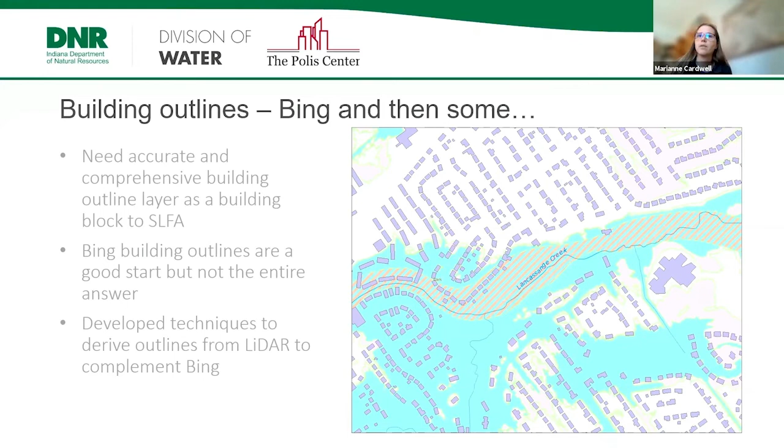As you can see here, there are a couple of examples of where the Bing data set is just not enough for this exercise. On the right-hand side, you can see a screenshot from Clarksville in southern Clark County. The area outlined in pink is where we don't have any building footprints, even though those structures have been there for a long time.

The other advantage of doing something with LiDAR is we can actually look through vegetation and see structures that are under trees, for example.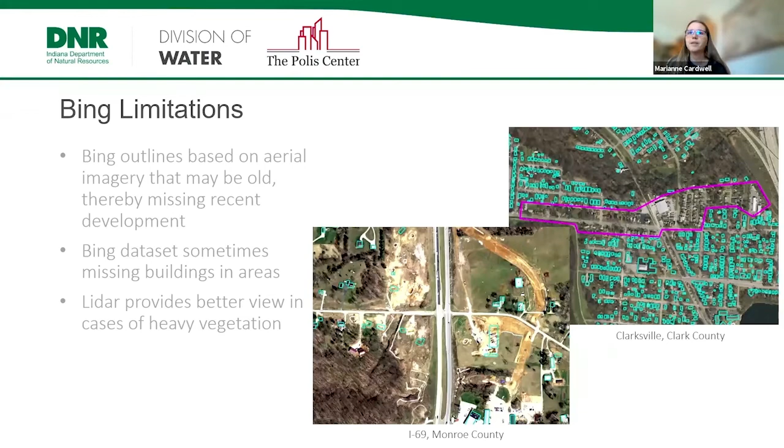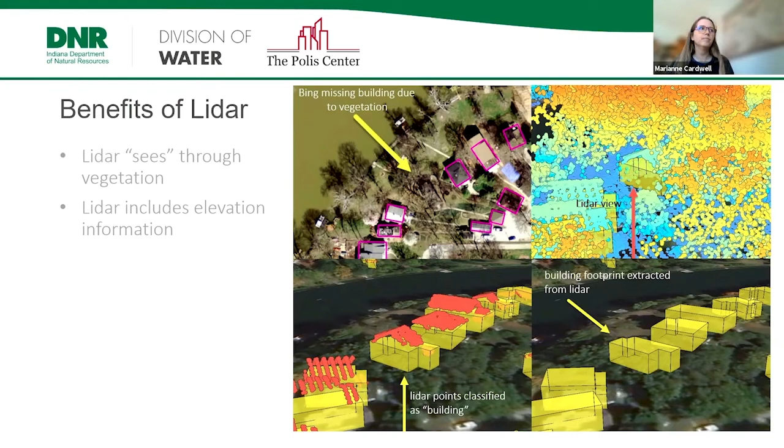So I do want to spend some time talking about what we looked at for a new version of flood elevation points. Since we derived the original set in 2009, I've been keeping those and upgrading those to the present day. We have developed a lot of different data that could feed into a new way of looking at these flood elevation points. The big one is the National Hydrography data set.

Indiana redid their NHD lines and published them with USGS. We did everything to at least a 1 to 2400 scale and up to a 6 acre drainage limit. So we have quite a bit of line work, really high quality line work that we're working with.

And then we did a large study with USGS and a bunch of other partners on fluvial erosion hazards. And one of the big items that you need when you're looking at fluvial erosion hazards is a channel dimensions, or estimated channel dimensions, for what a stream might look like in the field, given it's in a natural state.

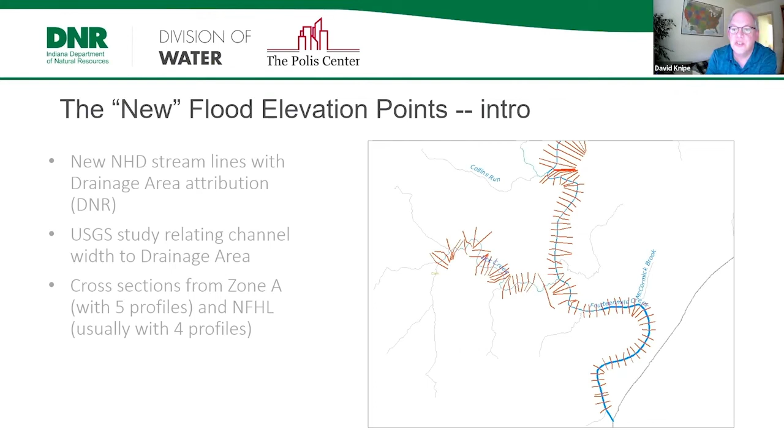We would like to update them, and we are updating quite a few of them, but that process takes forever. So we won't have that done in the next few years, but we need the information out of them, not just the cross sections that are published, but the cross sections that are inherent in the models also.

So we have initiated a project to research and derive cross sections for each model section or inflection point in the profile where we can. Again, some of that's going to be engineering judgment, but we've initiated that project, and so that feeds into what we do with the flood elevation points.

We also want to derive the 4% profile, which is usually the profile that's missing in the flood insurance studies, at least the historic flood insurance studies, and then put that data into the FEMA standard geodatabase format.

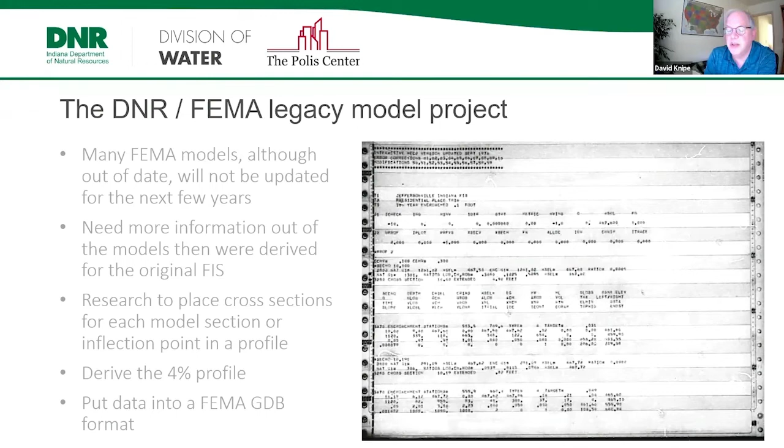So with that information and with the Zone A information, all the other things that we have, we've derived what we call the new flood elevation points, working from this what we call a wire diagram. So the first thing we do is we buffer each stream by 3 times that computed channel width. So the 3x stream is what we call that.

With that, we derive a left and right point elevation center lines. So we have 3 center lines, the actual center line, and then 2 offset center lines, one to the left, one to the right. And then we're going to derive points on each of those center lines.

We derive any missing profiles from the legacy model project that we talked about before. And we attribute each cross section from the FEMA GDB or from the Zone A models. So we have a complete set of cross sections, a complete set of profiles, and then we have the stream reaches, the 3 stream reaches.

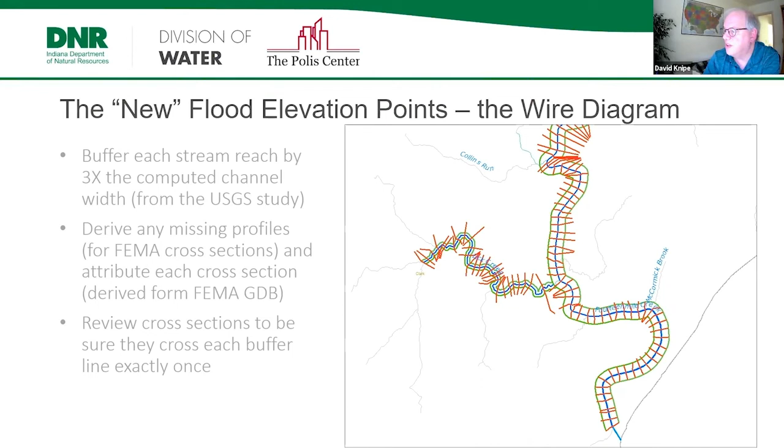Then from there we review each cross section, make sure that they cross each buffer line exactly once, so that we don't have conflicts with where the elevations are assigned along the center lines. And from there, we go ahead, and it's easy enough to run to put a point every 50 feet and derive the elevations from there.

The key part here is that extra layer of points, the left and right center lines, and the points on the center lines, minimizing the errors in finding the correct point. It was one of the weaknesses of the flood elevation points - now they're fairly consistent, but not as consistent as we'd like. By putting this buffer on the points and deriving extra flood elevation points outside of the stream center line, we get much better results in finding the correct elevation for a selected area or point along the stream.

One of the big benefits of the wire diagram is that it can be easily updated with new data, and the flood elevation points derived from that. So if you do a LOMAR, or a new Zone A study, you can just swap out cross sections and then rerun the script that derives the flood elevation points.

The FEPs are really easy to derive. Once you have the wire diagram put together - that's where the editing and all the review happens - you get that base set, and then running the FEPs is fairly easy. It does not fully solve the issues with buildings being closer to the wrong point, but it goes a long way towards solving that issue. I think we've gotten it to a point where we're pretty happy with the results.

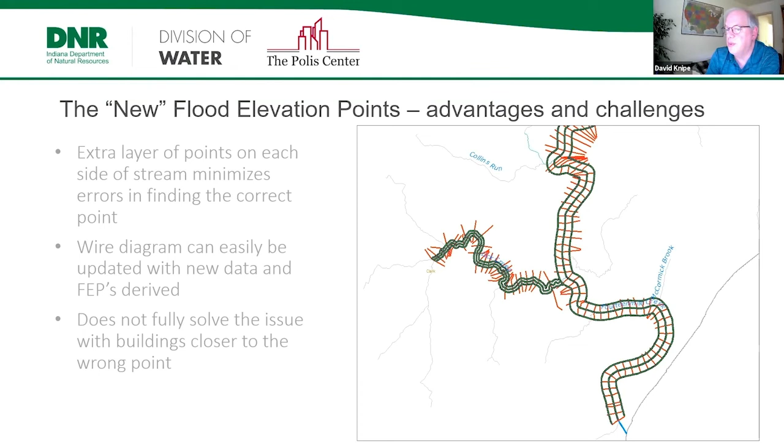But why don't we use grids? FEMA, of course, is really gung-ho on using gridded information, and a lot of times it's great stuff. However, there's a few limitations. As I said, we looked pretty hard at grid solutions, and while there are some certain positives to it, there were a couple negatives that we really had concerns with.

One big one is that for FEMA purposes, they require the grids to be clipped to the floodplain. That's usually a pretty good idea because things can get weird when you work with TINs and grids within a GIS system, and without a lot of processing and review, there's a lot you have to worry about there.

So deriving them and clipping them is good for what FEMA's talking about, but then how do you evaluate structures outside of that grid? We've seen a number of folks come up with different solutions to that are very clunky and hard to implement. But most of the structures - that's what people are looking for. There are a lot of structures out there that people have interest in knowing their flood risk for that are not within the 1% annual chance floodplain. As you see, 40% of NFIP claims are outside of the floodplain.

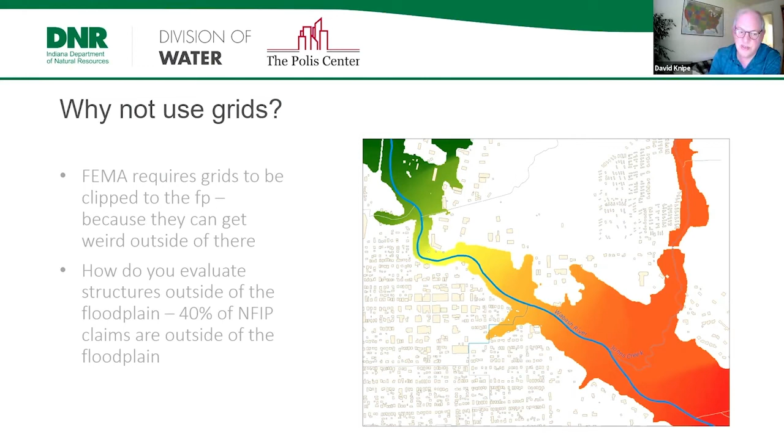Another issue with grids is that if you have new studies, or change studies, it's very hard to redo those grids if you don't have all the original information. Trying to patch grids together is always problematic. Interpreting backwater onto a grid and how you do that exactly is also something that can be very tricky to do.

So with the flood elevation points, we kind of get around all that. It just makes it a lot easier to handle the information. And then some of the other TIN and grid functions can get kind of wonky, especially if you have two streams in parallel - sometimes they get influenced back and forth if you don't put a ton of break lines in your data, that kind of thing.

So we've decided to go with our new versions of the flood elevation points and work from there. Certainly, we'll keep our eye on grid solutions, and as the technology evolves, maybe we will look at that. Maybe as we get more into 2D solutions, which work exclusively with grids, that will make more sense. But for now, we're pretty happy with our flood elevation solution.

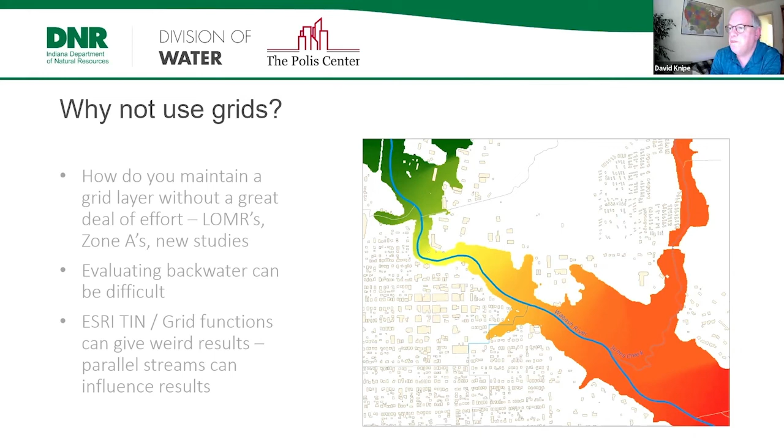we determined the nearest ground elevation and the nearest flood elevation point. Ground elevation, of course, is from our LIDAR, and the FEP is from our analysis. So with that, we've determined a risk score.

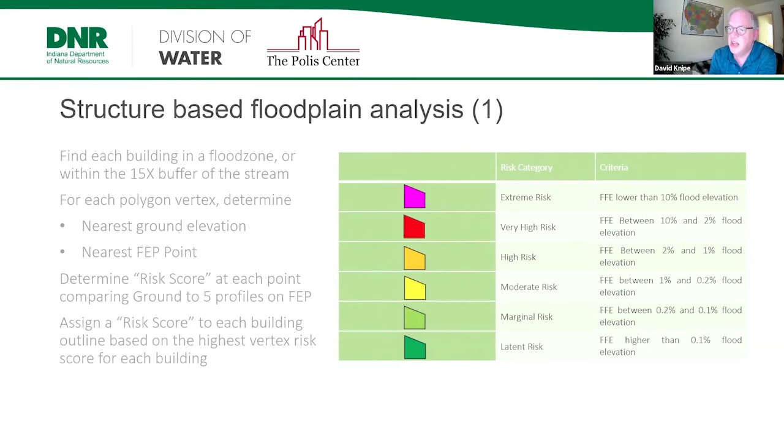So the way that we calculated what the difference in elevation was took us a few tries to come up with the right approach. But I think in the end we came up with something that just made a lot of sense. It just took us a little while to get there.

We did this on all of the buildings and then came up with the risk calculation.

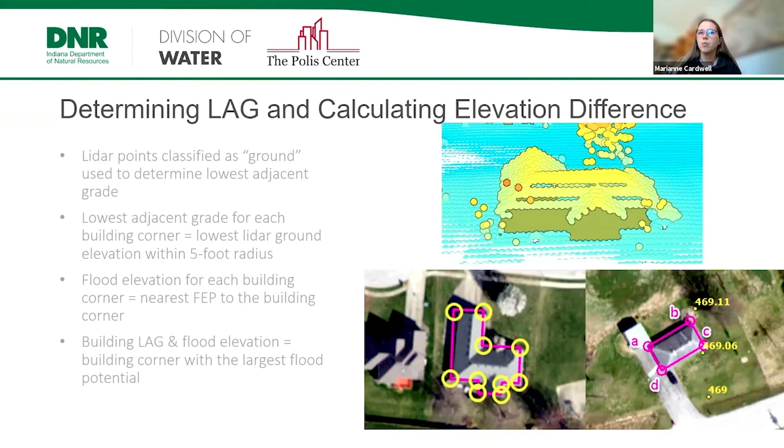But I think it's important to note that we assume the damage happens starting at the estimated lowest adjacent grade. One thing we'd definitely like to do in the future is research a little more how to determine the first floor elevation, because right now we're just grabbing the lowest adjacent grade to each building corner, but the first floor elevation may be higher than that, or it could be below, depending on the structure itself.

You could have a basement, a crawl space, or an elevated slab, and those things are a little more difficult to tell via the LiDAR. We do have information attached to each parcel about the improvements and construction done, which tells us whether there's a basement, crawl space, or slab. Unfortunately it's really hard, almost impossible, to link that information to a specific structure, so we ended up staying away from that and just used the difference between the lowest adjacent grade and the FEP.

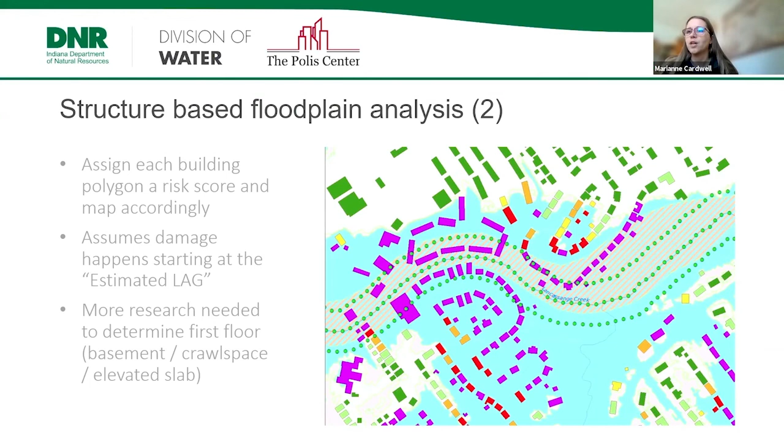As Marianne was saying, we attribute each building with that estimated LAG and the profile elevations from the nearest FEP, and from there worked through the analysis to determine the classification. Pretty straightforward. So we can use this information for scenario and what-if questions if we want to look at where we might be targeting various buyouts.

We can use this information for that, or just for informing local officials what the risk in their community is, so they can determine what steps they may need to consider to mitigate that risk. Like I said, we did not use building value or damage loss curves as part of our analysis.

We wanted a straight set of risk calculations that did not take into account the actual value of the building. But with this as a building block, that certainly can be done fairly easily if you're looking to use this data to cost out a project or determine what a buyout value might be.

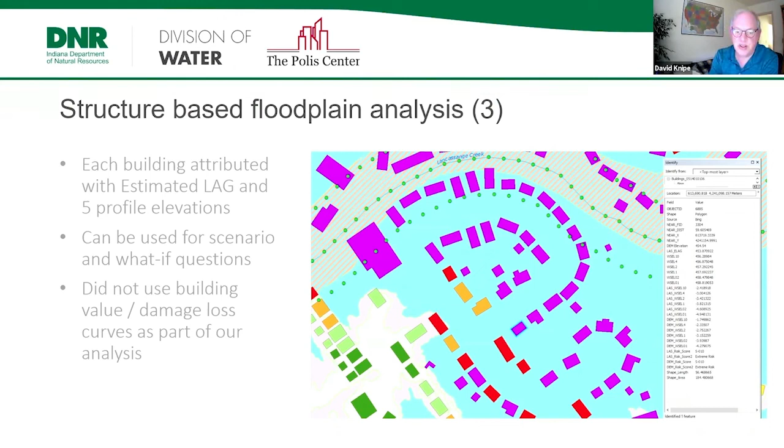So with that, that is our presentation. We are happy to take any questions that you might have. Thank you very much.